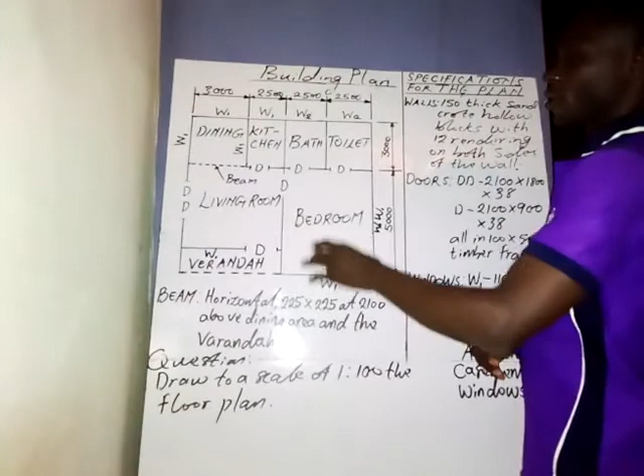As you can see, here we have the living room, here is the bedroom, here is the veranda, and here we have the dining, the kitchen, the bathroom, and the toilet.

Also, W1, W1, W2, W2, all the W's represent windows in the building.

Each of these is dimensioned. Here we have 3,000, this is 2,500, this is 2,500, 2,500, 3,000, and 5,000. Actually, the dimensions are in millimeters, as you know that in technical drawing we usually make use of millimeters.

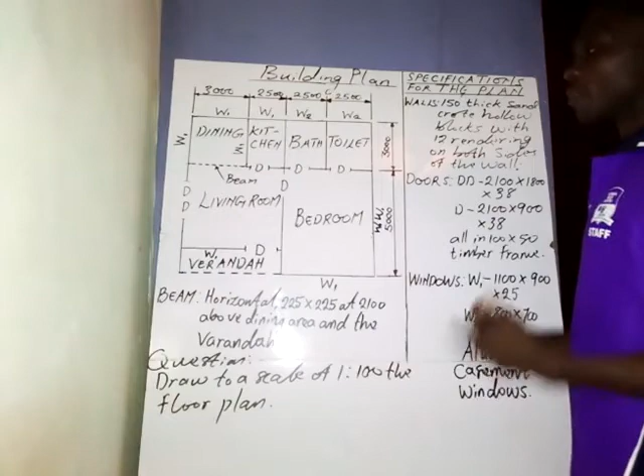Now, having given the building plan, another thing that we need, which is very important for us to answer any question that has to do with building drawing, is what we call specifications. What I want to do here is show you how you can construct a building plan. This building plan that you see here is known as a line plan. So we need to convert it to a solid plan by making use of the specifications given here. These specifications are just for the conversion of the line plan of a building to a solid plan.

Now the first is the walls. As written here, the thickness of the wall has to do with everything that we have here. So we have 150 thick sandcrete hollow blocks with 12 rendering on both sides of the wall. We need this, very very important.

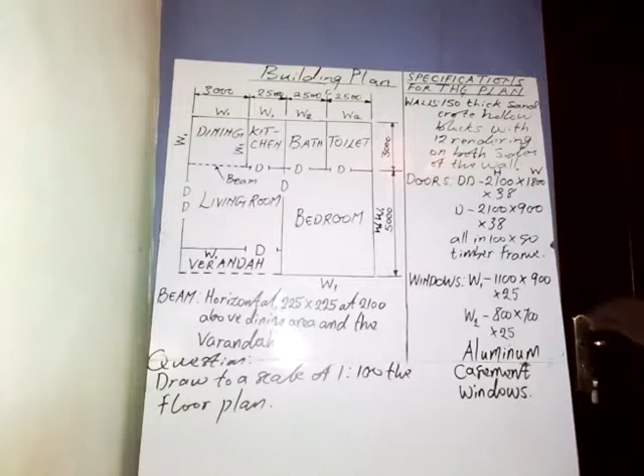What does each of these represent? I'm going to tell you. This 2,100 represents the height of the door, not the wideness, sorry for that - it represents the height of the door. 1,800 represents the wideness of the doors. And then this 38 represents the thickness of each door.

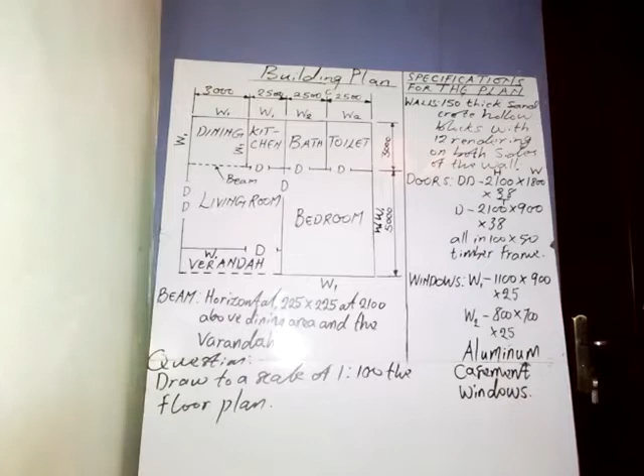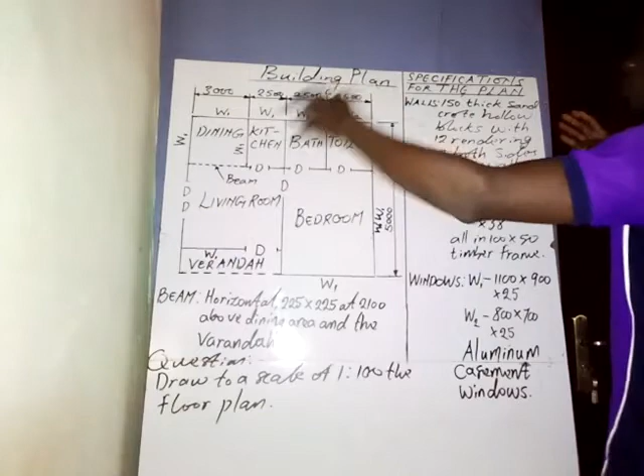So 2,100 is for the height of the door, as we have this board, this board has a height. And for the wideness, which is 1,800 - if these are the two doors, it means this is the combination of the two doors. Half of this is 900 and half of it is 900, so the total is 1,800. So 1,800 is for the wideness of the door, 2,100 is for the height of the doors, then 38 is for the thickness of the door - this board has a thickness, that's where I'm holding here.

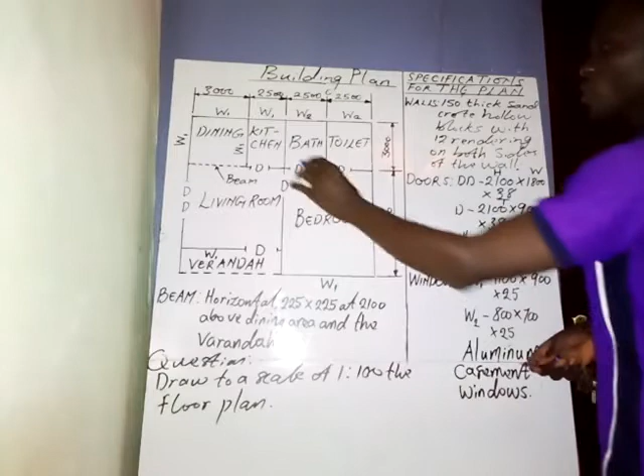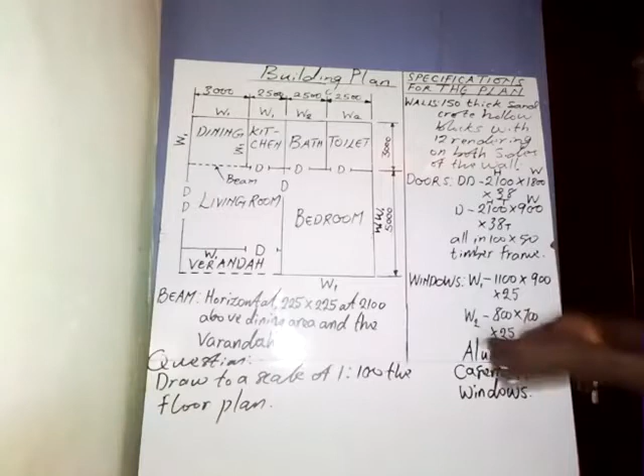Now, for the doors, these are the single doors that we have here - this one, this one, this, and this, and this. Here the height is 2,100, the wideness is 900, and the thickness is 38 millimeters. Then we are told that all are in 100 by 50 timber frame, so for every door we always have a frame for it.

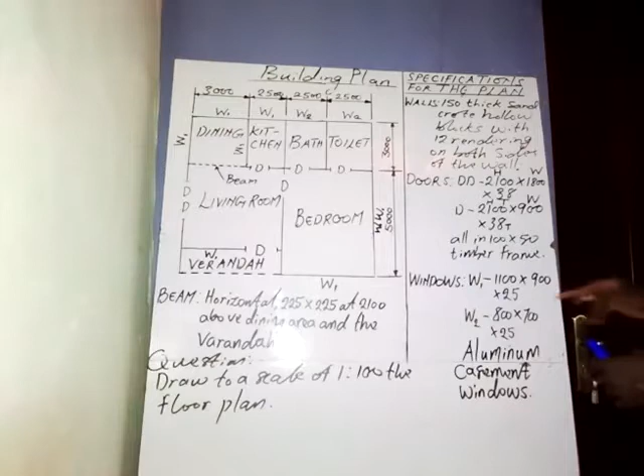Then we come to windows. This is another thing that you need to make use of when you are working on the building plan. So we have windows: W1 is 1,100 by 900 by 25. For W1, this is the wideness, this is the height, and this is the thickness. So 1,100 is for the wideness of the window, 900 is for the height of the window, and 25 is for the thickness of the window.

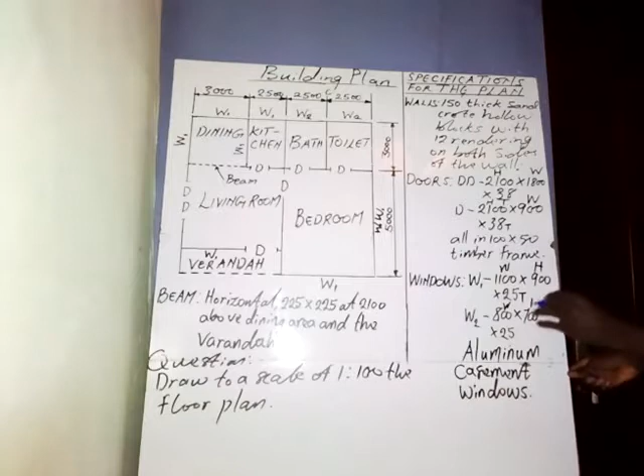Now for W2, the wideness is 800, the height is 700, and the thickness is 25.

Aluminium casement windows. So that's the type of window they put there.

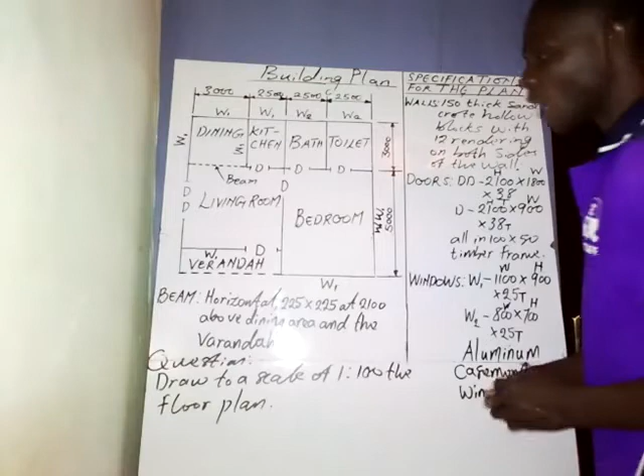Then another thing we have to take note of here is the beam in the specification. We are making use of this in the building plan, as written here, that we have a beam. Let's read what we have here so you can understand what we want to do.

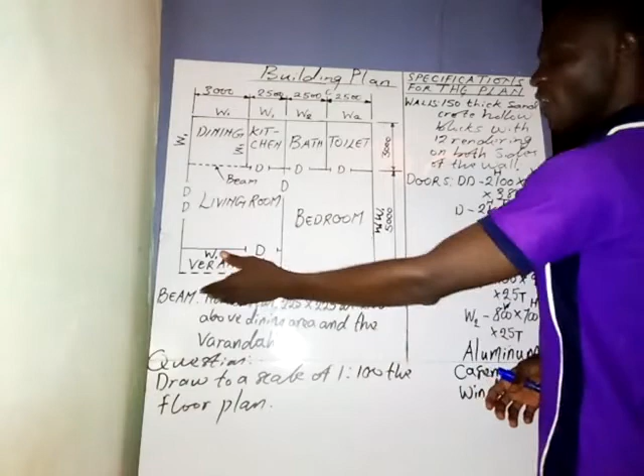So here we have a horizontal beam, 225 by 225, at 2,100 above the dining area and the veranda. What is the meaning of this? This type of beam is a horizontal beam. The beam is like this, straight like this, and it's a square beam.

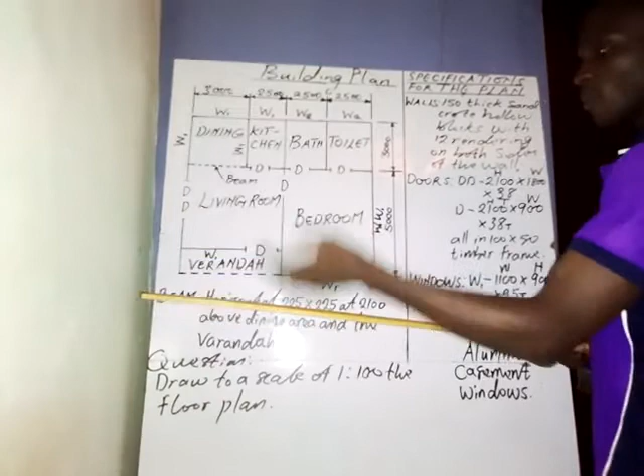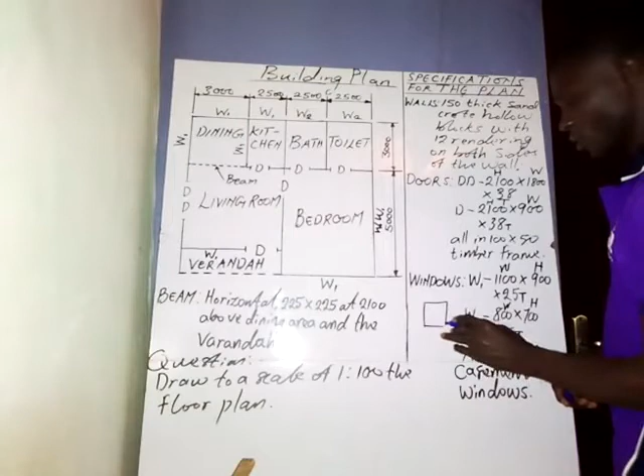What is the meaning of square? That at the edge here, and also at the edge here, it is in square form. So we have it in square form like this. So the edge is what? The end is a square. So this is 225, and this is also 225.

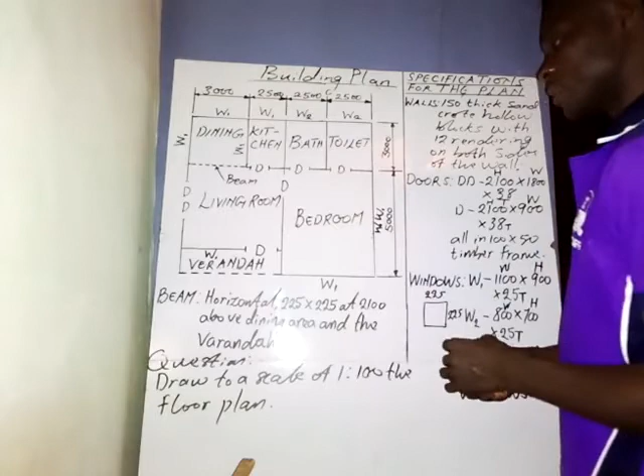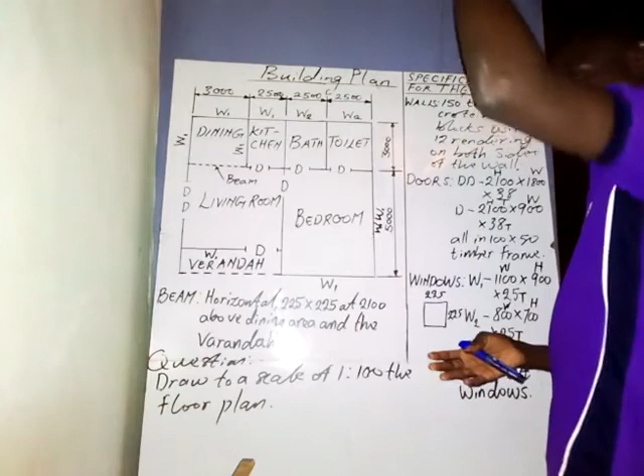So above the dining area and the veranda, it means the beams are at the top. So when you are coming into the building, the beam is above your head. So that is what we have here.

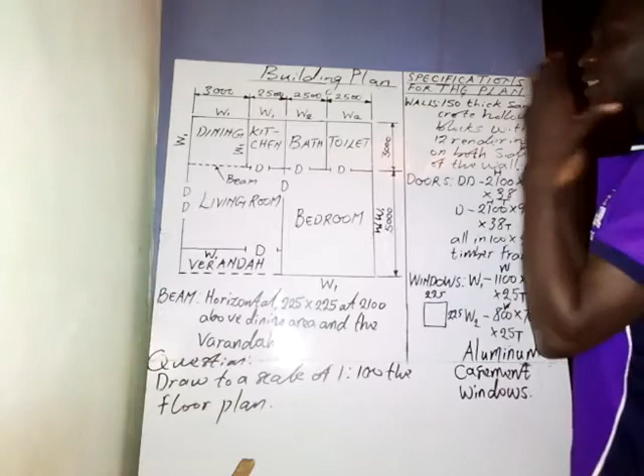So then, the question: we are asked to draw to a scale of 1:100 the floor plan. That is the question. We are to draw this building plan, converting this line plan to a solid plan by making use of this scale, 1:100. So what do we need to do?

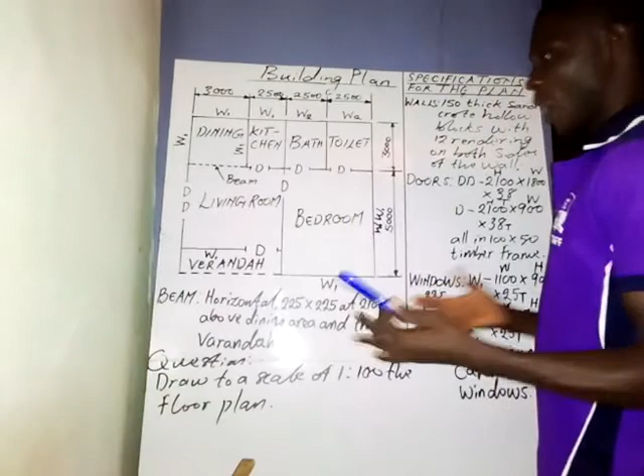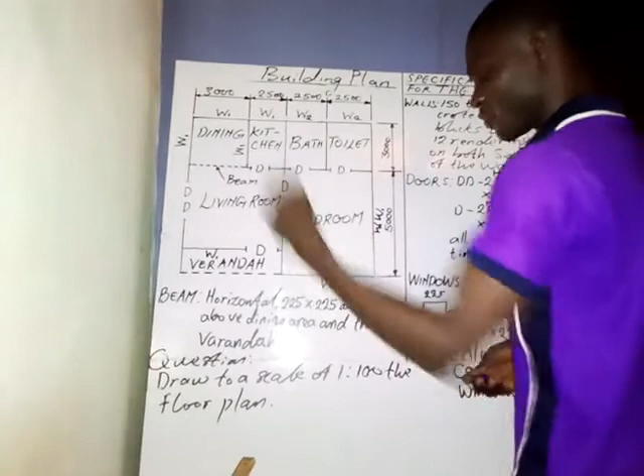Now let's go. The first thing we need to do, if you are doing this on your paper, you have to replicate what we have here. That's the first thing you need to do. Replicate all this. Now this wall, this line that you see here, they are the external wall of the building, the external part of the wall. What I mean is this.

Now, if we have a wall, if this happens to be a wall, okay, so if you look at this wall now, it has two parts: this is the external part, and this is the internal part. So these lines that we have here are for the external part of the wall. This line here, they are the external part of the wall. So the internal part is what we have here.

And there is a thickness, so we need to get the thickness of the wall. So as I said, you need to replicate this. You add all this together: 3,000 plus 2,500 plus 2,500 plus 2,500. All this here gives us 7,500. 7,500 plus 3,000, that will give us 10,500.

So we now divide 10,500 by 100, which is the scale. So whatever you get, this will give us 105.

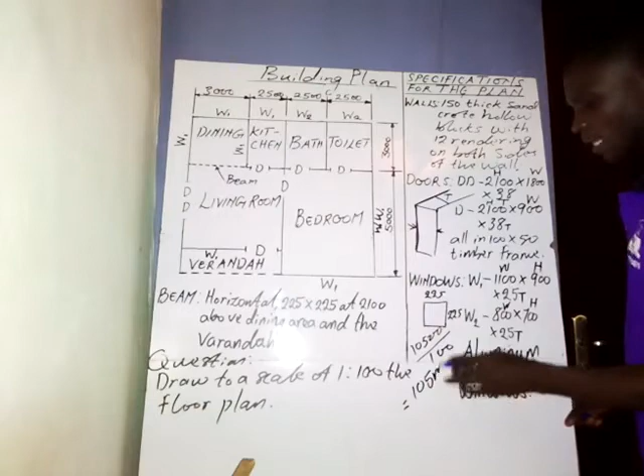1,000... so this is 10,500. Okay, so when you divide this by 100, this will give us 105, 105 millimeters. So take a measurement of 105 millimeters from here to here. So you draw this line.

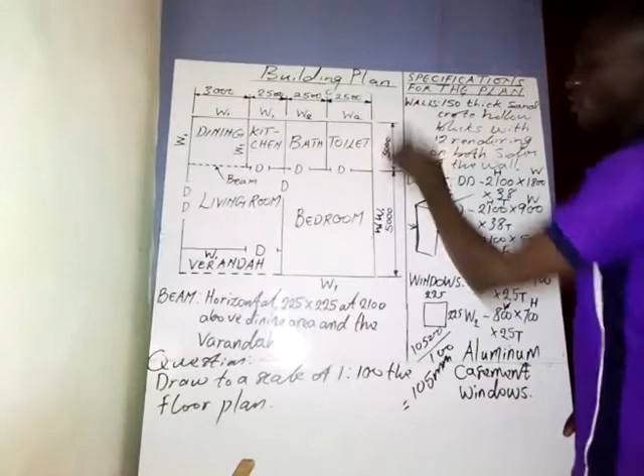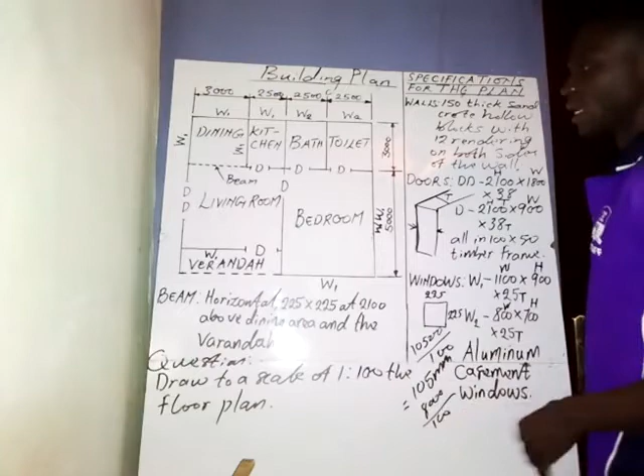Then you add this together, this will give us 8,000 - that is 5,000 plus 3,000 plus... that is 8,000. So divide 8,000 by 100, this will give us 80 millimeters. So you take a measurement of 80 millimeters from here to here, and you complete this rectangle.

You draw a complete rectangle. Then you now make this partition. So for the dining, the distance from here to here is 3,000. 3,000 by 100, that is 30. So you take a measurement of 30 from here to here. Then for the kitchen, we have 2,500.

Divide 2,500 by 100, that will give us 25. Take a measurement of 25 from here to here. Then the same thing, we have 25 from here to here, that is 25 millimeters. So when we are done with that, come to this side and take a measurement of 30 millimeters from here to here.

30 millimeters, because this is 3,000. 3,000 divided by 100 will give us 30. So take a measurement of 30 from here to here. And then this is 5,000. 5,000 by 100 will give us 50. Take a measurement of 50 from here to here.

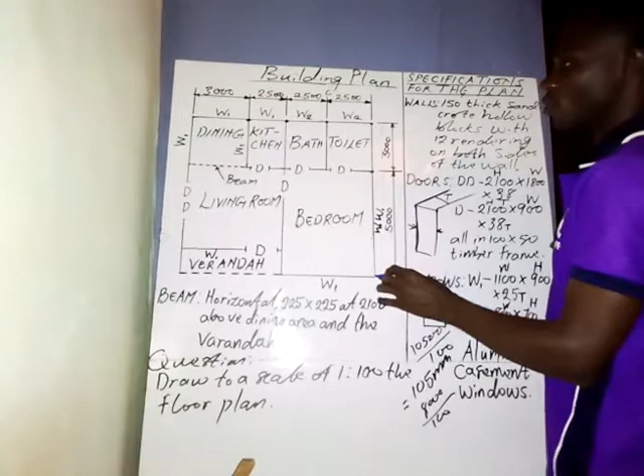Actually, the distance from here to here, from this wall or this line to this point, is equal to the summation of this and this. So if we add 2,500 plus 2,500, that will give us 5,000. 5,000 by 100 is 50. So distance from here to here is 50 millimeters.

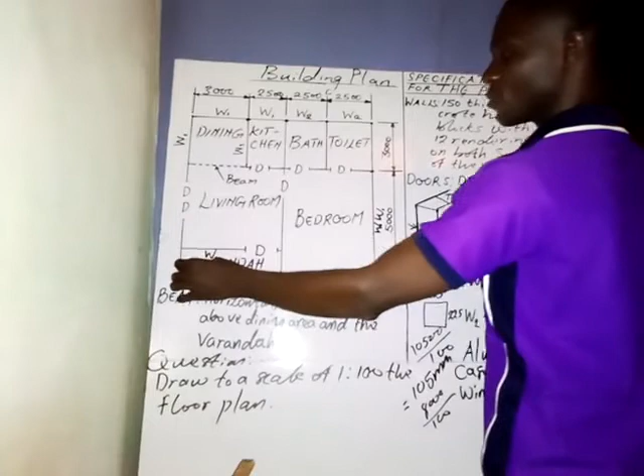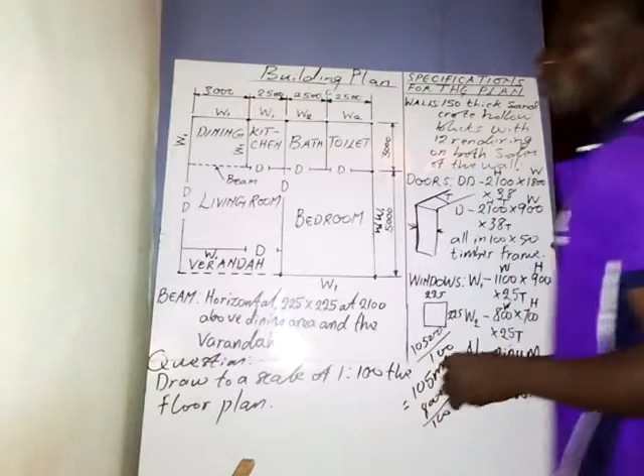And for here, distance from here to here, so we have 3,000 plus 2,500, that will give us 5,500. So distance from here to here is 5,500. So you complete this line plan. So you draw all these lines.

So the next thing that you need to do is to make it a solid plan. So how do we make it a solid plan? We are going to make use of the walls now. So we come to the wall.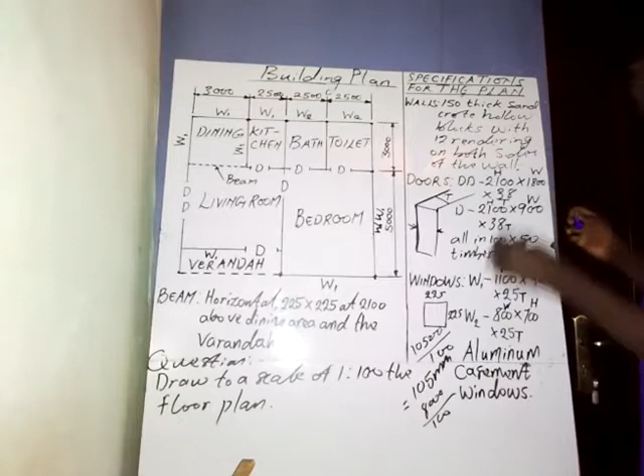We are told that the thickness of the hollow block in the wall, in this wall here now, I believe you can see my hand. So in this wall, we have what? We have a hollow block inside this. What we see here is rendering. After it has been rendered, it was painted. So we have a hollow block inside.

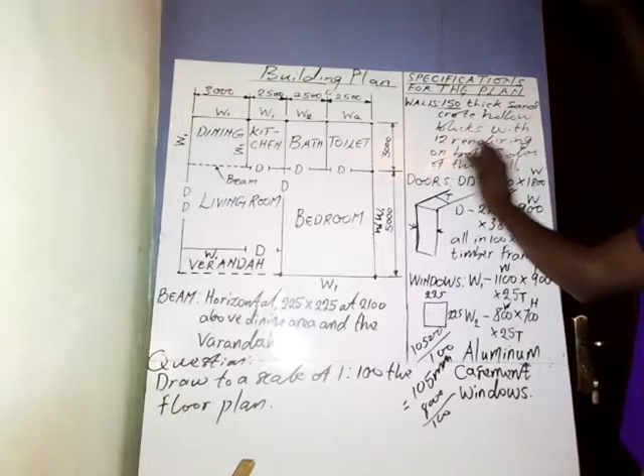So the thickness of the hollow block is 150 millimeters. So then we have rendering, which you can see here. We have it here, we have it on the other side. So as we are told here, with 12 millimeters rendering, it's on both sides of the wall. So it means that on this side, the thickness of the rendering is 12 millimeters. On the other side, that is the inner part of this wall, or the outer part of this wall, we also have the thickness of the rendering to be 12 millimeters.

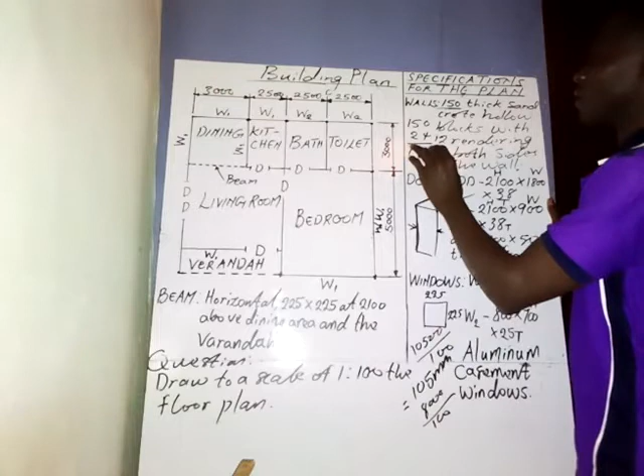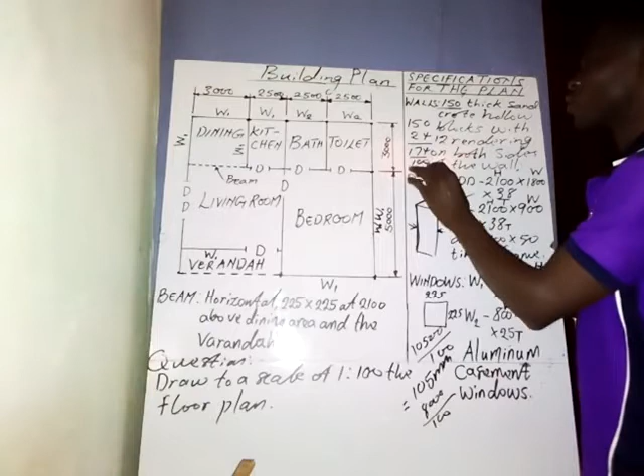So 12 plus 12 will give us 24. So we now add, we have 150 as the thickness of the hollow block inside the wall, then plus 24, and this will give us 174. So this 174 is the thickness of the wall with rendering. So you divide this 174 by 100, and this will give us 1.74. So this 1.74 may be hard to take from your ruler.

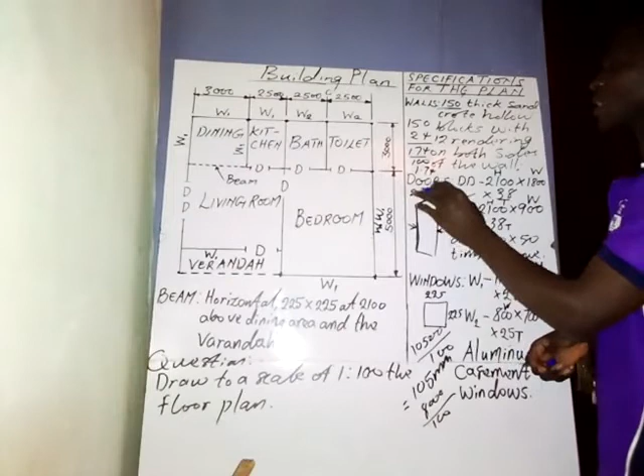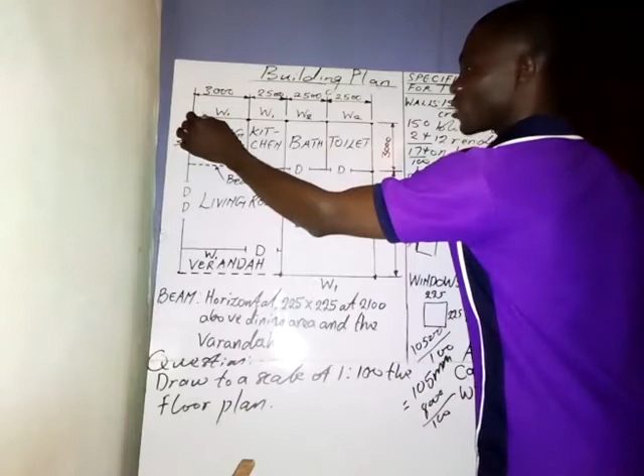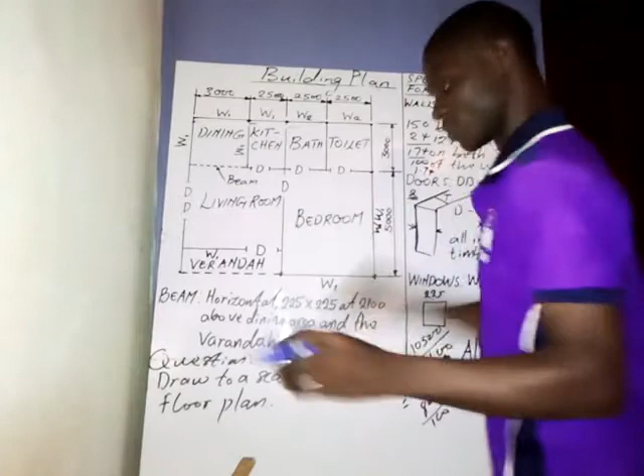So what you need to do is approximate this to 2 millimeters. So what you now need to do is come to this point here, take a measurement of 2 millimeters from here to here. I believe you can see me. So draw a line like this. It will not be straight. Okay, let me make use of this. Alright, so you take a measurement of 2 millimeters and you draw a line like this to this end.

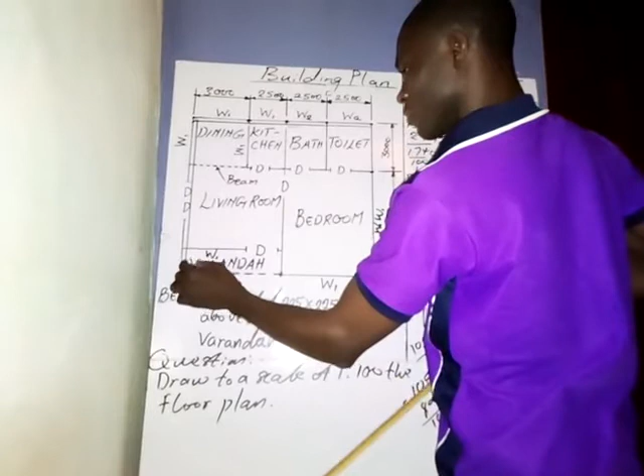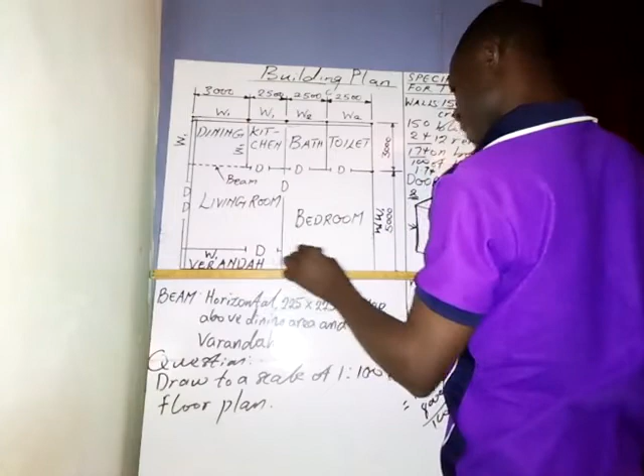Then from here to here too, take a measurement of 2 millimeters. Take a measurement of 2 millimeters and draw it down like this. Then come here, from here to here, take a measurement of 2 millimeters. It may look rough. And you draw. All these lines should be drawn with thin continuous lines because you may still need to rub off some things. Then from here to here, take a measurement of 2 millimeters. Okay, alright, so we have this.

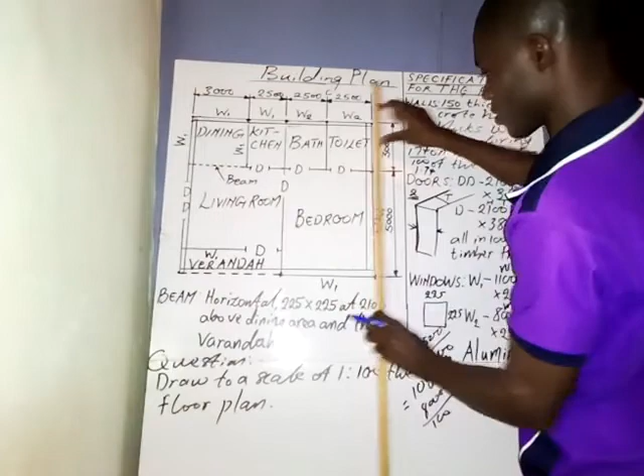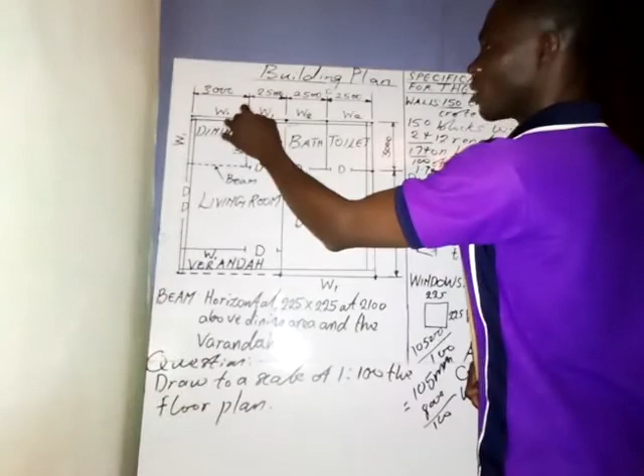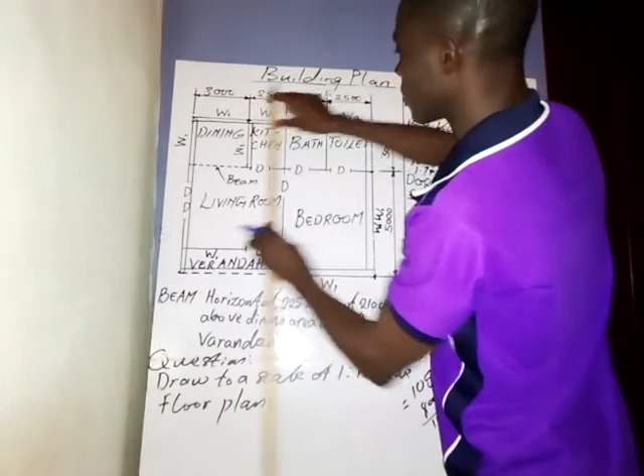Now you come in, we have done it for the longer part. So for this inner one, from here, take a measurement of 2 millimeters and draw the line here. Also, if you have taken it here, don't take it here again, so take it on this side. So take a measurement of 2 millimeters here. Then take a measurement of 2 millimeters here.

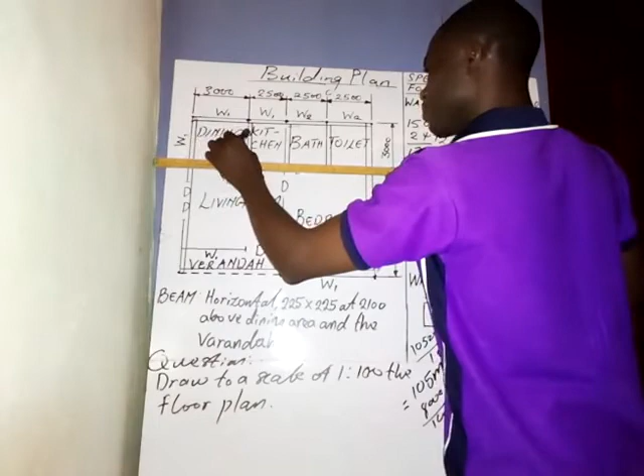Okay, then for this part, we have a beam here. So the thickness of the beam, we also take it as 2 millimeters. Take a measurement of 2 millimeters from here. Don't forget that the dimension, 225, given for the beam, is the square edge of the beam. So you make it with short dashes line for the beam, because that's how we represent the beam.

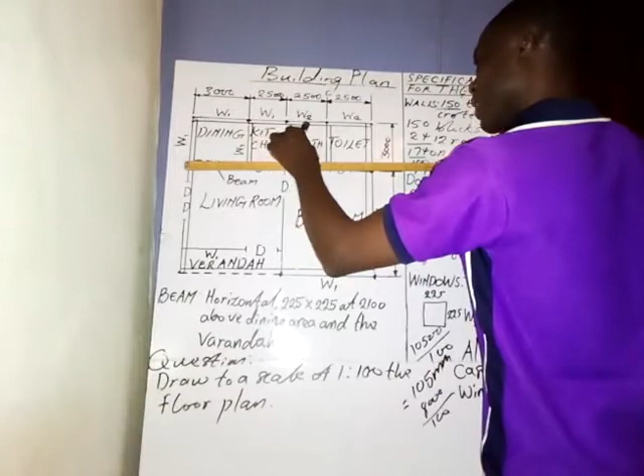So all these ones, the rest, are thick lines. So you draw like this, you draw this and you draw this. Alright, so that's for the inner part.

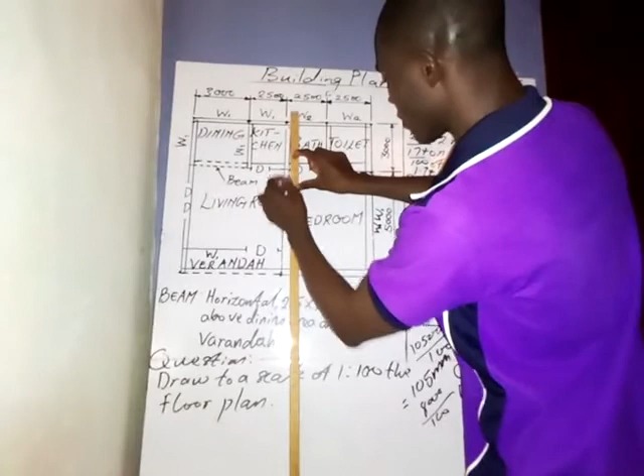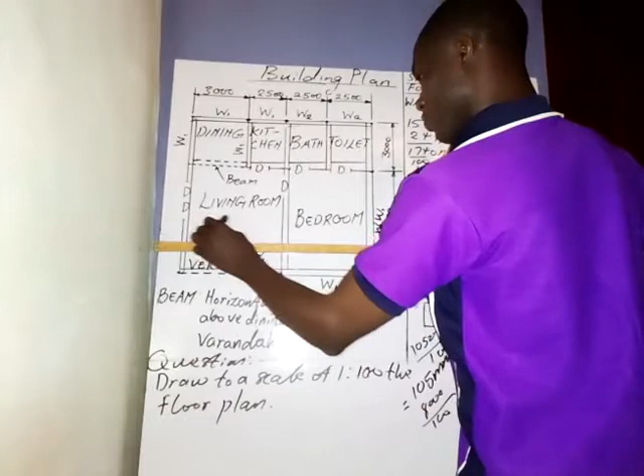Then next we also need to make, so I should have made this from here. I should have drawn this down without 2 millimeters. And also here, we take a measurement of 2 millimeters and we draw. Alright, so all these are the thickness of the walls, the thickness of the walls.

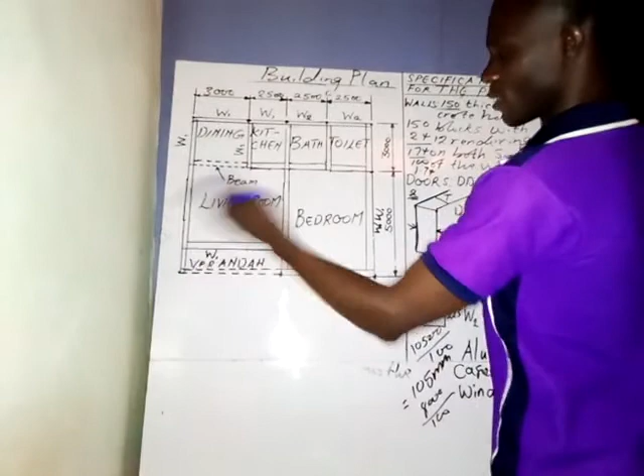Alright, so what I just did here, there was a mistake when I drew the solid line. This is supposed to be a short dashes line because we have a beam here as stated in the specifications. Next, what I did here is I've closed all this wall, removed DD for the door, so I know where we have the door.

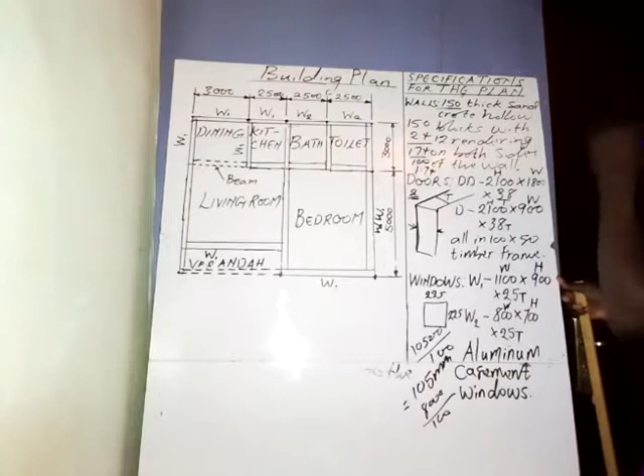Now let's put the door first. So as we have here, let's come to the door. We have a double door. In the case of double door, the wideness is 1,800, and we are only making use of the wideness in the plan. We also have the wideness of 900, and for the window we are only making use of the wideness. So let's put them there.

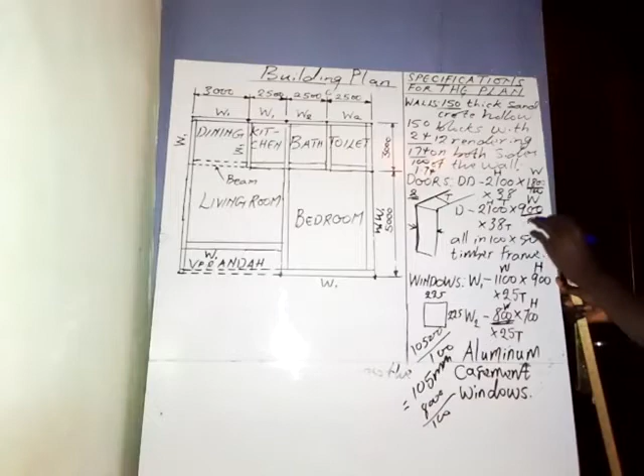So you divide this 1,800 by 100 for the double door, and that will give us 18 millimeters. That will give us 18 millimeters.

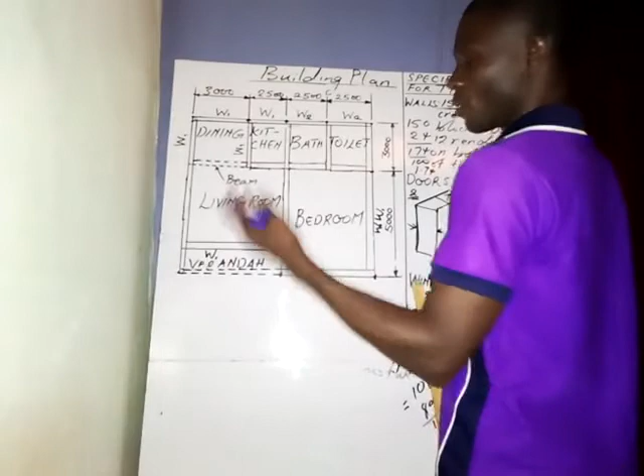So just try as much as possible to centralize the doors and the windows, depending on where it is placed. For me, I placed the doors for the double door somewhere here, because this plan that you see is carved out, I produced it myself. I didn't copy it from any question, though I will still solve WAEC questions. I've solved building drawing on WAEC questions, I will still do that, but this one is just an introduction so that you can quickly grab it. So that's what I've done here by giving you this simple building plan.

Now, if I want to put the door here, so double door, I want to put the double door here. If I take a measurement from here to this place, the first is I will take 1800, that is 18 millimeters, not 1800 again, so I divided it by 100, that is 18 millimeters. Take a measurement of 18 millimeters from here to here.

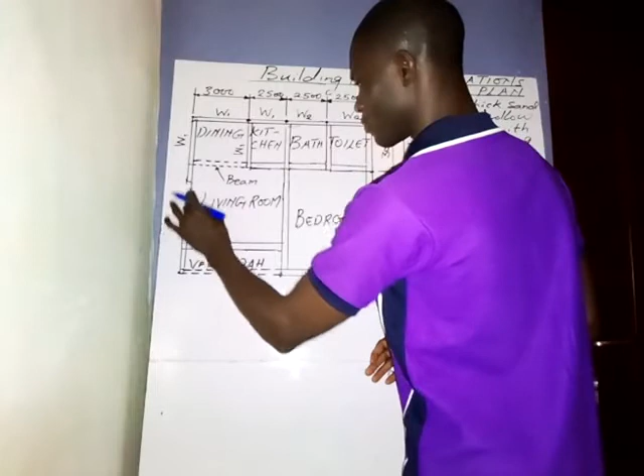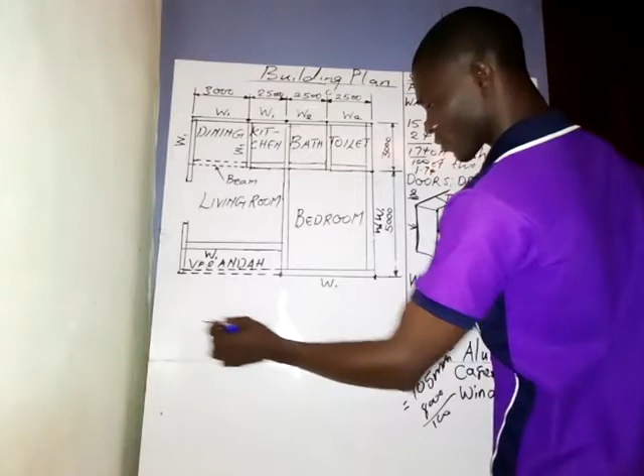So I can rub this off from here to here. I want to open the door. I know that you know the symbol for the door. So for a double door, we have a symbol. So if I open it and have a line here, I open it like this.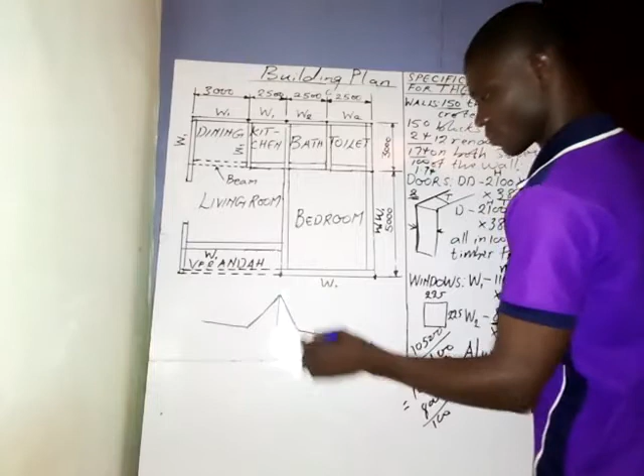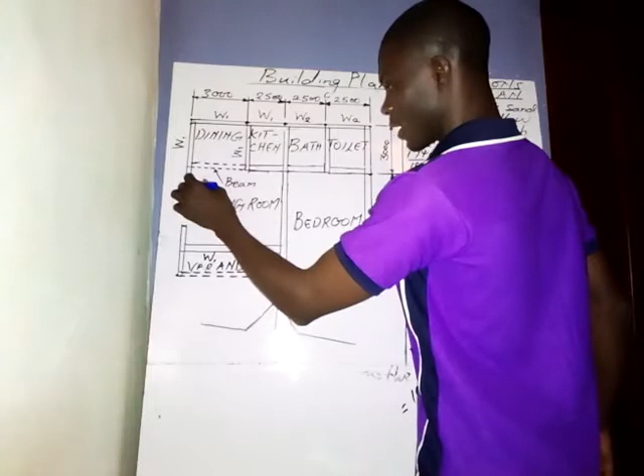So for double door, I want to open them in this way. There is a frame that separates the two of them. Distance from here to here is 9 millimeters, from here to here is 9 millimeters. So if I open them, I can open them like this. Open them like this. So what this means is that when I open this door, it will move to this side, it can rest on this wall.

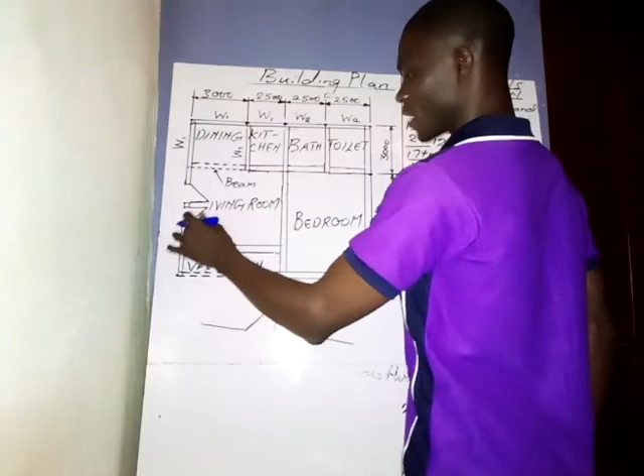And so for this, I can open this to this side and to rest on this wall. Okay, so that's the first part.

So another door, we also have a door here, that is just D, whose wideness is 900. So 900 by 100 will give us 9. So from here, if I start from here, I take a measurement of 9 millimeters to here. So here I will have a door. I'll draw a line like this and join this with it, so I can open this door and rest on this wall. So there is another door here, we also have another door here.

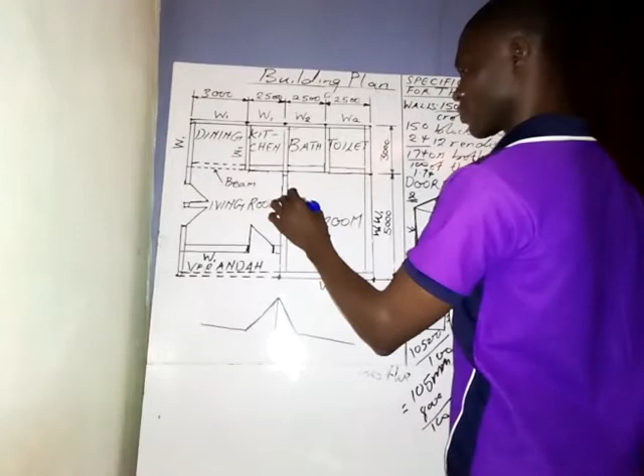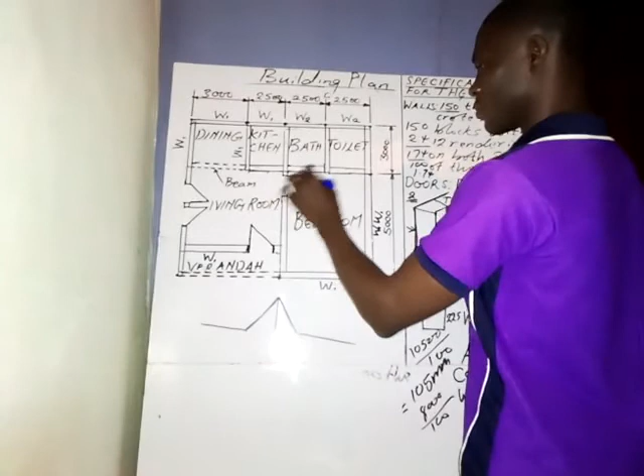So that is D. From here to here is 900. If I open this door to this side, it will rest on this wall. Then we also have another door here, that is D, from here to here is 900. So the same thing with what we have here.

So if I open this door, it will rest on this wall. So I have that there. And then we also have a door that goes into the kitchen. So the same 900. Then if I open it, it will rest on this wall.

So I think we are done with all the doors. So the next we have the window.

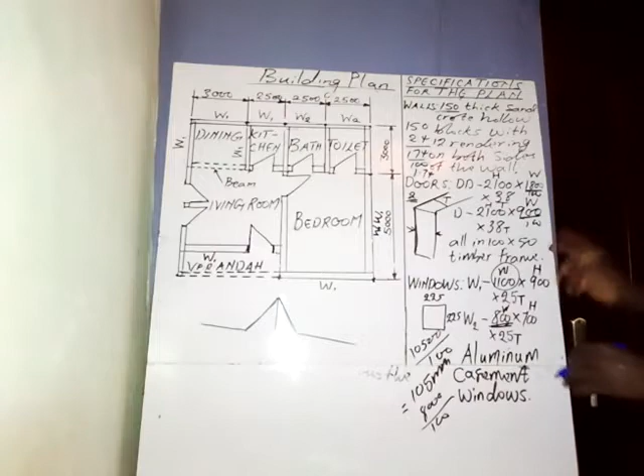So we have W1. W1, the wideness is 1,100, and the height is 900, thickness is 25. So we are going to divide this and this, but we are only taking this one in the plan. This will be used for elevation and also for the sectional view.

So we're only taking the wideness for the plan. W1 is 11 millimeters. So we take a measurement. If I put it here, just try as much as possible to centralize the window. So take a measurement from here, take a measurement of 11 millimeters down. Having done that, draw like this. I believe you know the symbol. Draw like this, that is the window there.

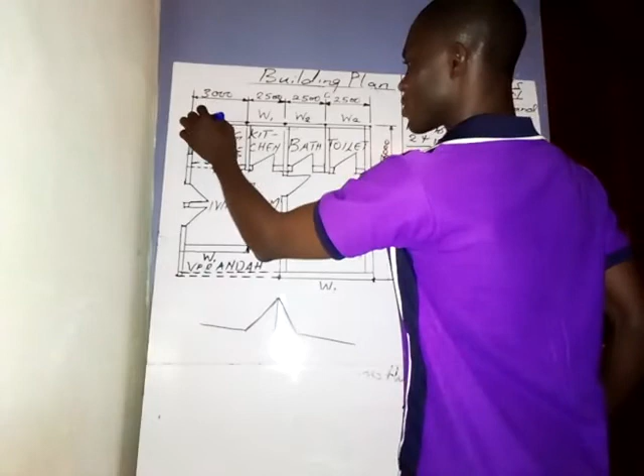And then also, try to centralize it. So we have W1, from here to here is 11 millimeters. So draw a line like this, a straight line. That's how we represent it, but you can just put 1, because of the thickness that we have taken. Then here we also have W1.

And I put W2 here. This is the kitchen, I put W2 there. So for W2, we have 8 millimeters. We take a measurement of 8 millimeters from here to here and draw this line. Then we also have from here to here, that is 8 millimeters, draw this line. And also from here to here, 8 millimeters, draw this line. So we have that.

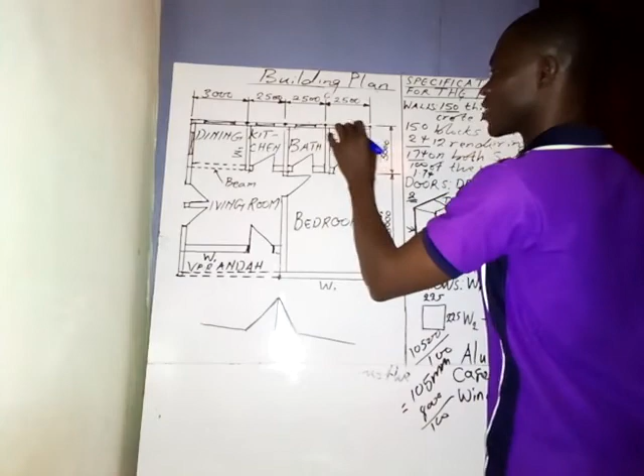So here we have double windows. That is W1, W1 as we have here. So that would be 22. Take a measurement, put a frame, we separate them, a frame will separate them. Then here we have what?

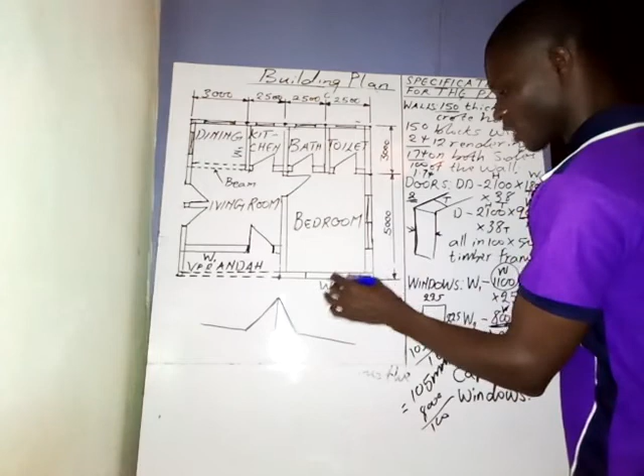We have W1. So draw a line and take 11 millimeters and draw. Then we also have here, we have W1, so from here to here, make sure you centralize, try as much as possible to centralize it. Draw this line. And we also have W1 here, so from here take 11 millimeters. So we have this.

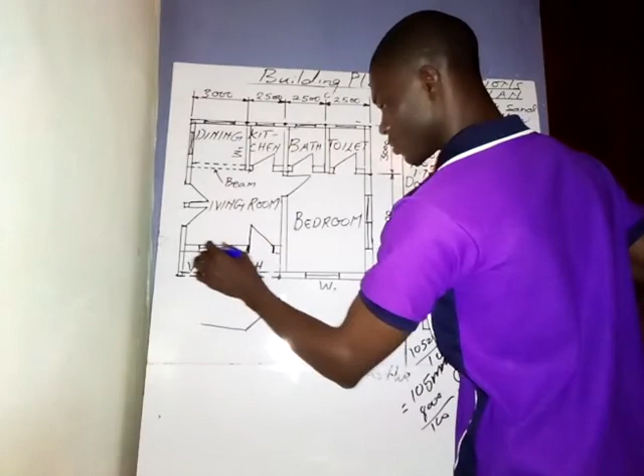So all the windows have been put here. Having done this, I think we are through with the building plan. So the next thing we are going to do, which should be in our next lecture, will be on the building elevation.

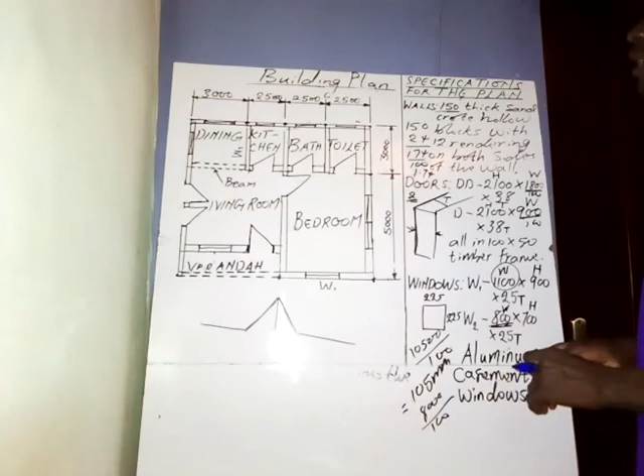I'm going to use the same question or the same diagram to do that, so that we can flow together. So thank you for listening.